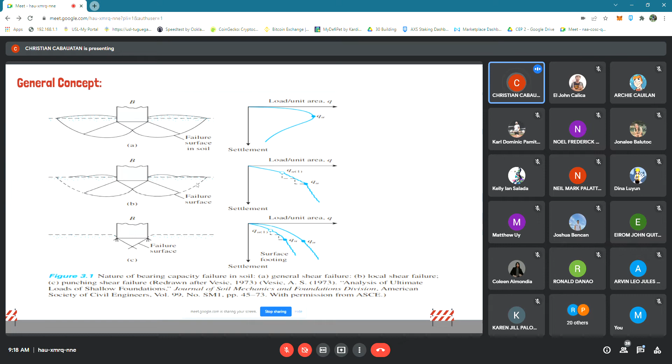There are two types involving soil bearing capacity: one is the Terzaghi bearing capacity, and the second is the Meyerhof bearing capacity. For now, we are dealing with Terzaghi's bearing capacity.

So what is the Terzaghi bearing capacity about? Terzaghi, 1943, was the first to present a comprehensive theory for the evaluation of the ultimate bearing capacity of rough, shallow foundations. According to his theory, a foundation is shallow if its depth is less than or equal to its width - similar to what we discussed earlier about shallow foundations.

He suggested that the foundation depth can equal 3 to 4 times its width, and this may still be defined as a shallow foundation. He also suggested this for a continuous or strip foundation whose width to length ratio approaches zero.

The failure surface in soil at ultimate load may be assumed to be similar to that shown in figure 3.5 later. Note that this is the case of general shear failure as defined in 3.1a. The effect of soil above the bottom of the foundation may also be assumed to be replaced by an equivalent surcharge, where gamma is the unit weight of soil.

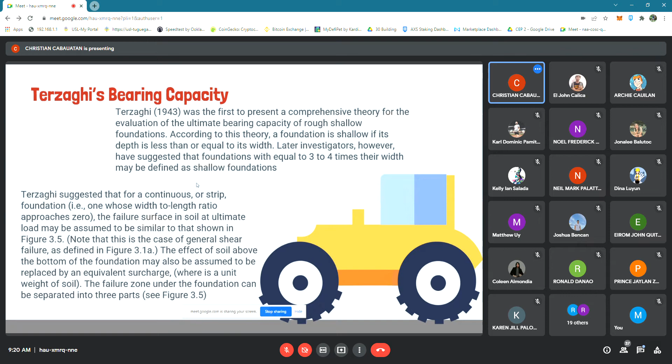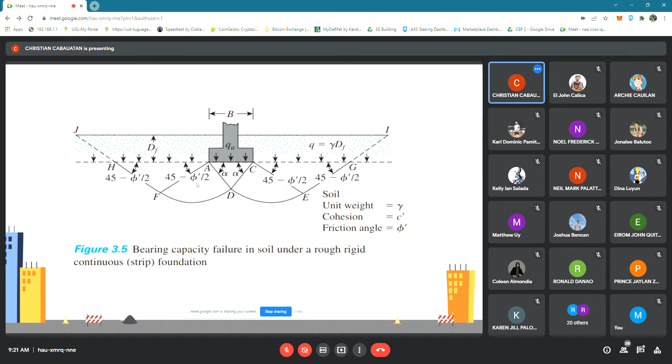So using equilibrium analysis, Terzaghi expressed the ultimate bearing capacity in this general form. So the ultimate bearing capacity can be derived as C and Nc.

Don't mind the apostrophe on top of the C, don't pay attention to that. So: C times Nc, plus Q times Nq, plus 1/2 or 0.5 gamma B times N-gamma. This will be used if the foundation is a strip or continuous foundation.

Wherein C, as I said before, is the cohesion of the soil. Gamma is the unit weight of the soil. And Nc, Nq, and N-gamma are the bearing capacity factors. These could be determined once the friction angle is identified. It's in the table, I'll show you later.

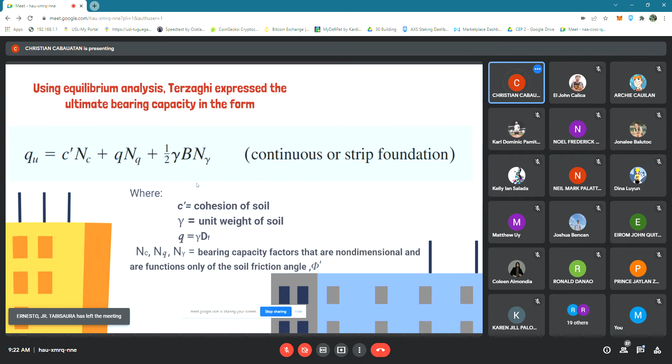So to estimate the ultimate bearing capacity of square and circular footing foundations, the equation may be respectively modified - since it's not just for strip footing or continuous footing.

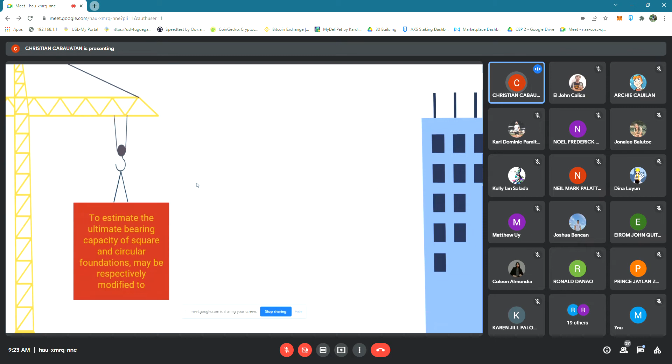Terzaghi also introduced the square footing and the circular footing. For square footing, the ultimate bearing capacity is equal to 1.3 CNC plus QNQ plus 0.4 gamma BN gamma. The difference lies in their coefficients.

For strip footing, the coefficients are 1, 1, and 0.5. For the square footing, the coefficients are 1.3, 1, and 0.4.

For circular footing, the ultimate bearing capacity is equal to 1.3 CNC plus QNQ plus 0.3 gamma BN gamma. So for circular footing, the difference is only in the coefficient of gamma BN gamma, which is 0.4 for square footing and 0.3 for circular footing.

This was derived from the formulas. We would not derive it further because the derivation is very long. It could take us 2 sessions or 3 hours just to derive one equation.

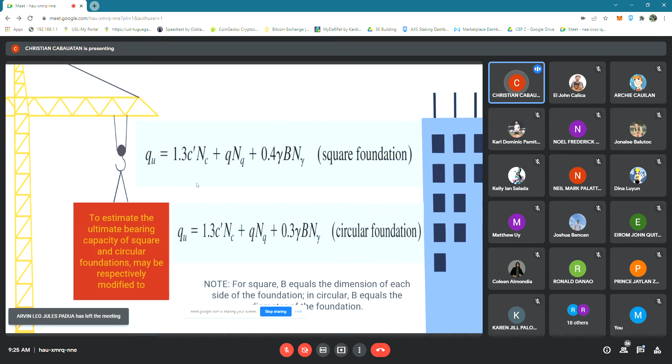Take note that for square footing, B equals the dimension of each side of the foundation. For circular footing, the width B equals the diameter of the foundation. Remember that.

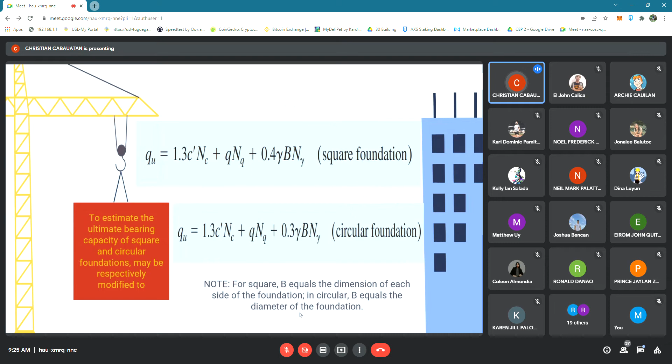For foundations that exhibit the local shear failure mode in soil, Terzaghi suggested these modifications. The formula or equations change when using local shear failure compared to the general shear failure. So for local shear failure, these would be the equations.

For strip foundation, the ultimate bearing capacity is equal to 2/3 CNC plus QNQ plus 0.5 gamma BN gamma. For square foundation, it would be 0.867 CNC plus QNQ plus 0.4 gamma BN gamma. And for circular foundation, it would be 0.867 CNC plus QNQ plus 0.3 gamma BN gamma.

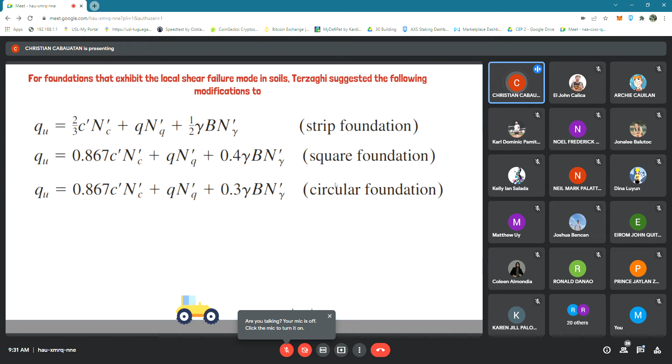So just as general shear failure has a table to determine the different coefficients of bearing capacity, there's also one for local shear failure. This one will be different.

So for that one, if the friction factor is 0, the corresponding coefficients of NC, NQ, and N gamma are 5.7, 1, and 0 respectively.

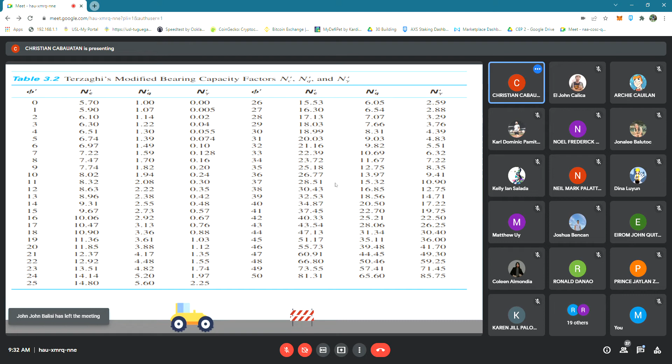Do you have any questions, Jaan? None. Okay. The next one is the factor of safety.

As I discussed earlier, Q allowable is equal to Q ultimate, or the ultimate bearing capacity, over the factor of safety. The factor of safety typically ranges from 2.5 to 3.

However, some engineers prefer to use a factor of safety. The net ultimate bearing capacity is defined as the ultimate pressure per unit area of the foundation that can be supported by the soil in excess of the pressure caused by the surrounding soil at the foundation level.

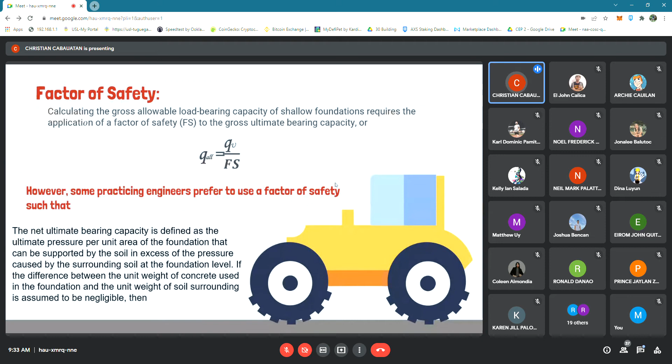If the difference between the unit weight of concrete used in the foundation and the unit weight of the surrounding soil is assumed negligible, then the net ultimate bearing capacity is equal to the ultimate bearing capacity minus the bearing capacity, which is derived by gamma, or the unit weight, times the depth of the footing.

So the derived formula is: Q allowable, or the net ultimate bearing capacity allowable, is equal to Q ultimate minus the bearing capacity, over the factor of safety. That's how they used the factor of safety.

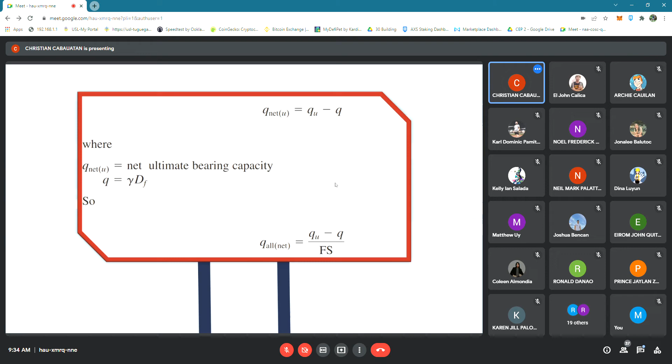Do you have any questions regarding that before we move on to our first problem? Any questions? Okay, I hope so.

For the first question, okay? Engineer Pamitan, can you read the problem?

A square foundation is 2 meters by 2 meters in plan. The soil supporting the foundation has a friction angle of 25 degrees and cohesion of 20 kilonewtons per square meter. The unit weight of soil, gamma, is 16.5 kilonewtons per cubic meter. Determine the allowable gross load on the foundation with a factor of safety of 3. Assume that the depth of the foundation is 1.5 meters, and that general shear failure occurs in the soil.

Okay, thank you, Engineer Pamitan. So what are we looking for here? It is the allowable gross load. Is that correct? Am I correct?

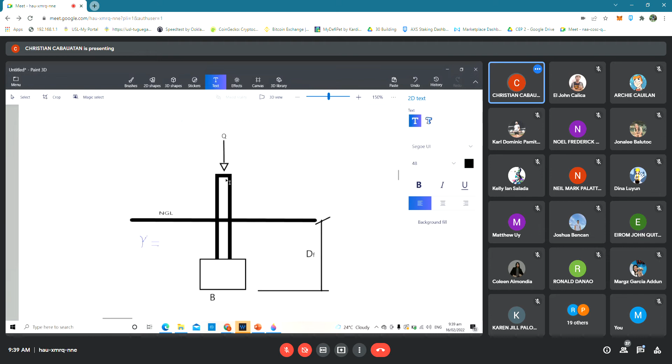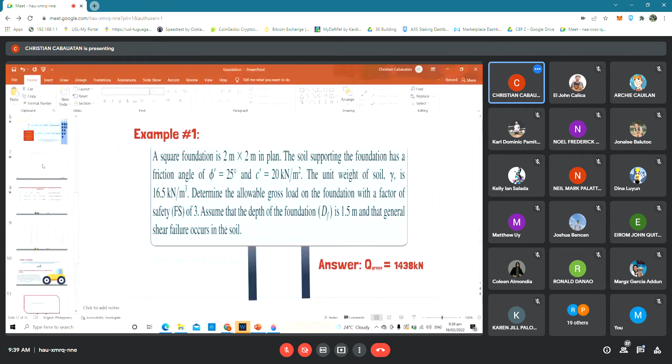So what is the friction factor? It is 25 degrees. Let's go to the table. What is the corresponding value for 25 degrees? It's down here. See it? For 25 degrees, NC is 25.13, NQ is 12.72, and N gamma is 8.34.

Did you follow? Did you follow? Okay, thank you.

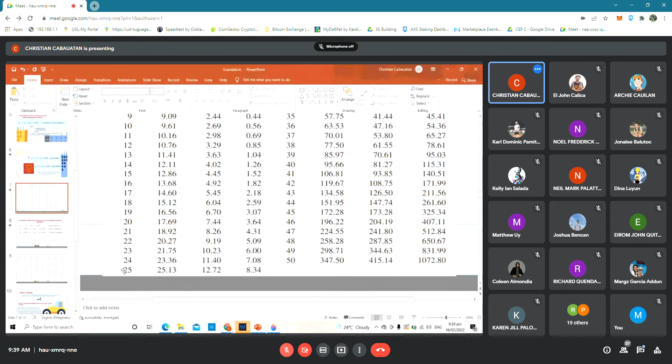So let's go back there. I've already put that in - NC, NQ and N gamma are there. And I also put the width of the footing, which is 2 meters. The cohesion is 20 kilonewton per meter square. And gamma, I just wrote as Y, is 16.5 kilonewton per meter cube, and the friction angle is 25 degrees.

Okay, so what formula do we use? It's a general shear failure. What is the formula for a square footing or square foundation? What is the formula? Anyone from the group - QU is equal to?

Okay. QU is equal to? Ano yung formula natin na gagamitin natin? 1.3, 0.867. Ha? Ano yun?

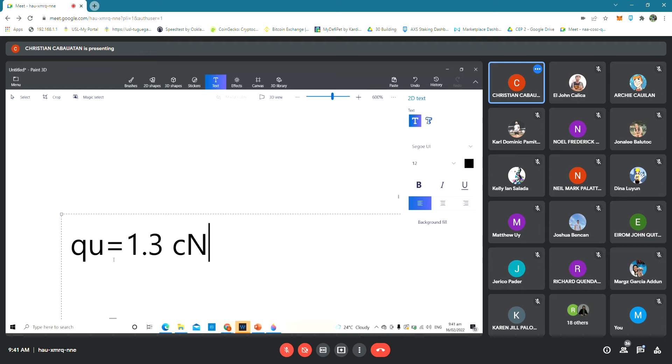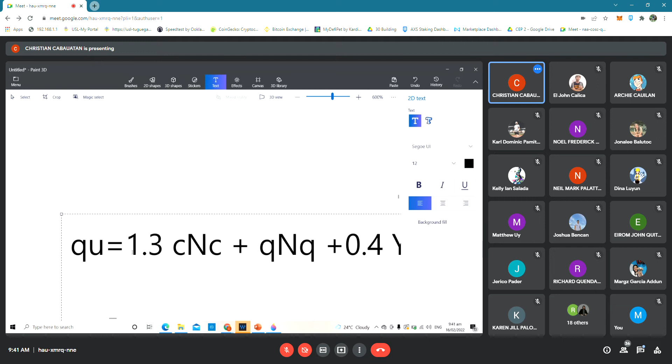1.3 CNC, CNC plus QNQ, sir. QNQ plus 0.3 ba? 0.4, 0.4. Okay, buti at naalala nyo. 0.4 gamma, BNY gamma, sir. gamma. B and gamma. Tama ba? Tama lang? Agree lahat? Yes, sir.

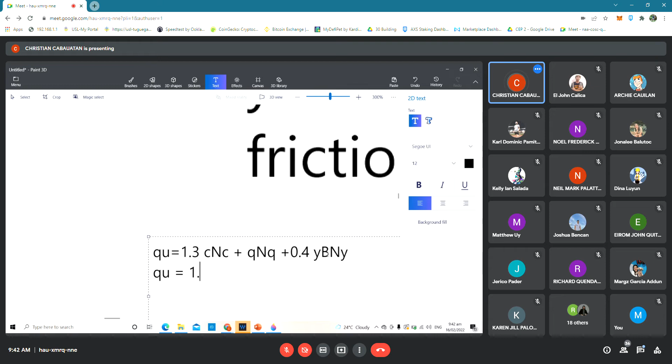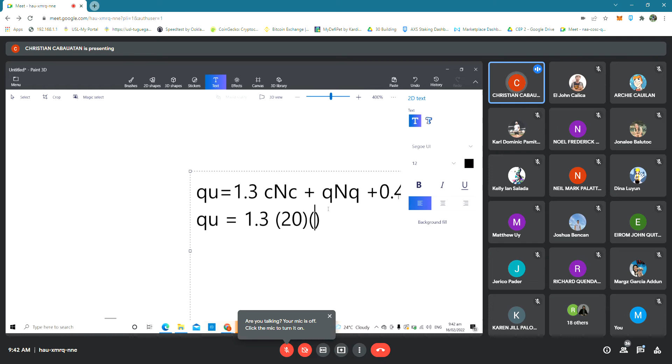Okay. So QU therefore is equal to 1.3 multiply natin kay C. Ano yung gano'n na ni C? It is 20 kilonewton. Tama? And then ang kanyang NC. Ano yung kanyang NC na? It is 25.13, 0.13.

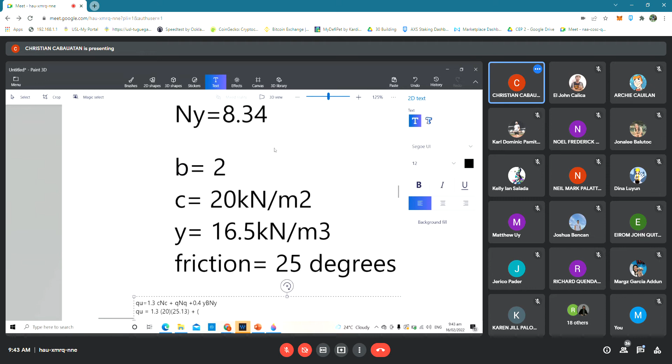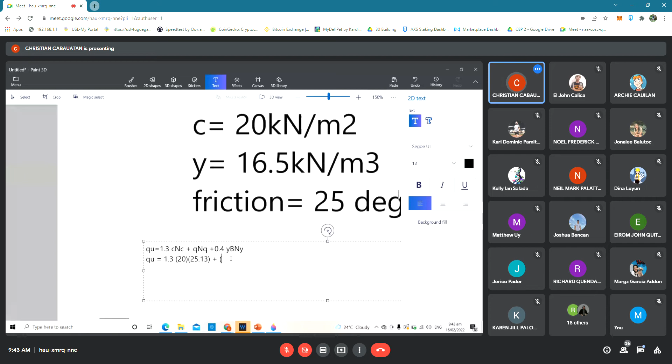I-add natin kay Q and Q. Ano na yung Q? Ano yung ilalagay natin sa Q? Anyone from the group? Ano yung ilalagay natin sa Q? Gamma times DF, sir. Okay. Ano yung gamma natin? It is 16.5. Am I right? Tama ba? Yes, sir. O, 16.5.

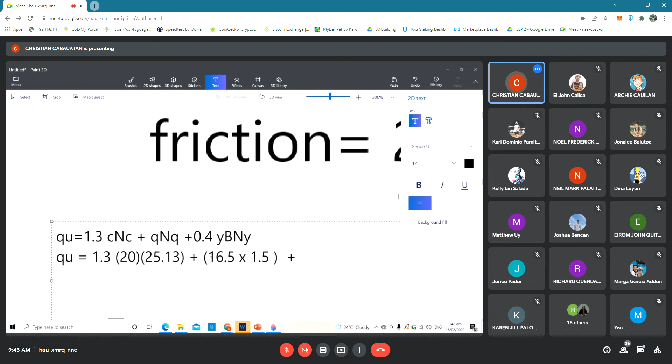Multiply natin siya kay the depth of the footing, which is 1.5. Ilang? Multiply pa natin yung dalawa kay NQ. Ano yung NQ natin? 12.72. Yesterday, nakakalimutan ko si NQ na ilalagay.

And then, multiply, i-add natin kay 0.4 times gamma. It is 16.5. Multiply natin kay B. It is 2. And then, multiply natin siya kay, ano yung multiply natin kay N gamma, which is 8.34.

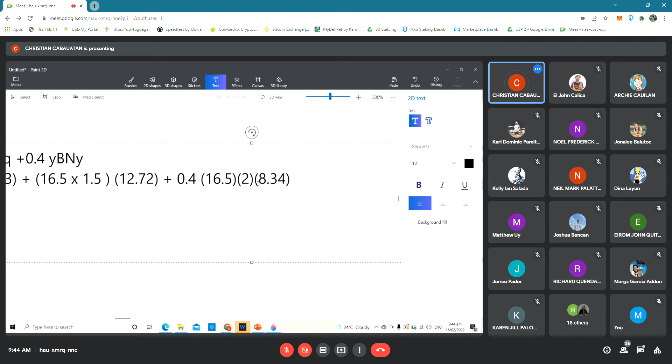Ano yung kanyang ganon? Ano yung kanyang tawag dito? Unit. Ano yung kanyang unit? Agree ba ang ilalagay kong unit ay kilonewton per meter? Agree ba lahat? kilonewton per meter?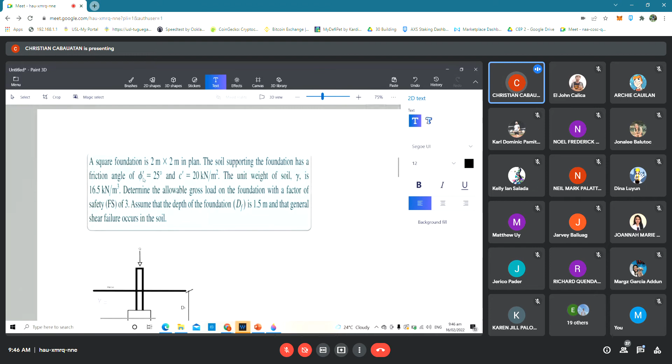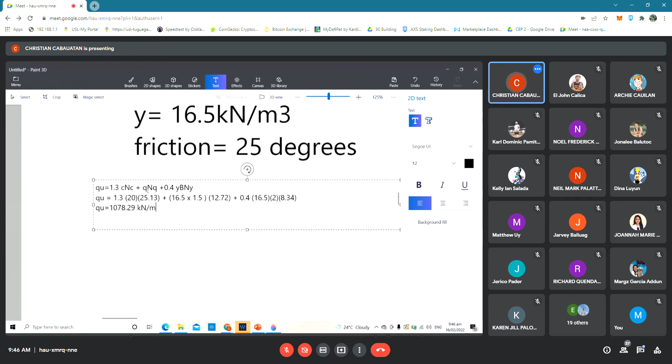Tignan nyo yung problem. Yan o. Yes, sir. Meter ba? Yan o. Tignan yung problem. Observe nyo yung problem. Meter ba siya? O, tignan nyo na lang dito sa formula na to. Ang cohesion, it is kilonewton per meter squared times NC. No? Ano? NC, wala siyang ganun yan. Wala siyang tawag dito. Wala itong unit.

So, ang unit ni ultimate bearing capacity ay kilonewton per square meter. Okay? Tama lang? Okay lang? Okay lang ba? Yes, sir. Okay lang ba? Clear? Okay.

So, ito na ba yung hinahanap natin? Yung 1,078.29 kilonewton per meter square? Yan na ba yun? Engineer Cabauatan. Yan na ba yung hinahanap natin? Si 1,078.29? Engineer Cabauatan.

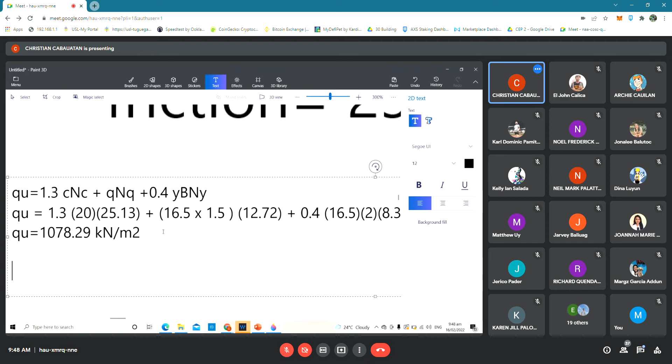Hindi pa po, sir. Bakit hindi yan? Ano ba yung... Kasi... Yes. Ano yun? Allowable gross po ang hinahanap. Hindi ba ito yung allowable gross? Hindi pa ba ito yung si allowable gross? Guys, hindi pa ba ito yung si allowable gross?

Okay. So, tama yung sinabi ni Engineer Cabauatan, no? Hindi pa ang hanapin natin is si allowable gross. Hindi pa ito si allowable gross kasi hindi pa tayo nag-subtract or hindi pa tayo nag-apply ng kanyang factor of safety. Okay? So, it is a ultimate pa lang. Ultimate bearing capacity niya pa lang.

Therefore, to determine its allowable, no? So, Q allowable, the Q allowable is equal to the Q of ultimate divided by factor of safety. Tama ba? Tama ba yung formula? Tama lang ba?

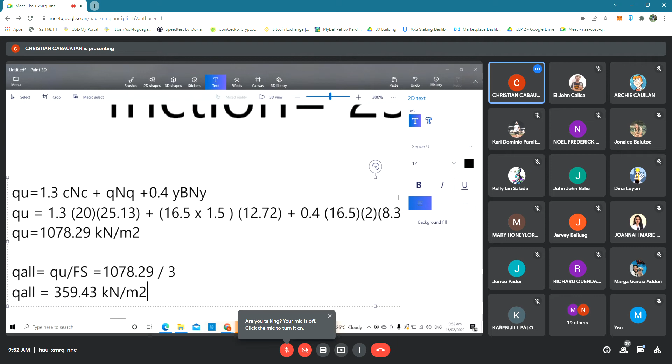Okay. Going back to our sa ating problem. Okay. So, ito na ba yung hinahanap natin? Si Q allowable, 359.43 kilonewton meter squared. Di ba? Hindi pa yan. Kasi ang nasa problem, it is stated na ang ating hanapin ay si allowable gross load. Load siya.

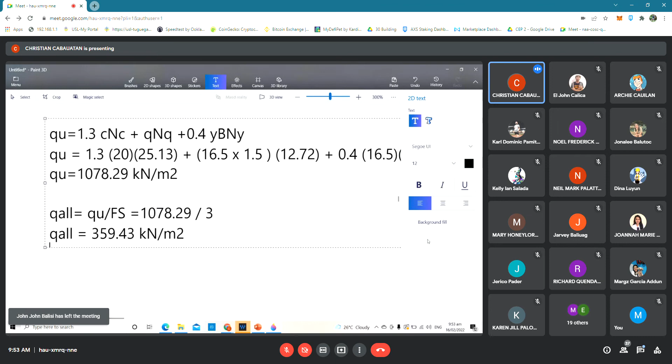No? So, kapag yan ang tinataatin, ang ating formula, we consider its area. Kanyang area. Ang footing area. No? So, therefore, ang total load or total allowable gross load can determine as Q malaki is equal to the Q allowable times, ano yung multiply natin sa kanya? Ano yung multiply natin sa kanya?

Hindi ba ang kanyang area? Tama ba na ang kanyang area ang i-multiply natin? Okay. Ang area ng square is equal to B squared.

Therefore, ang Q natin is equal to 359.43 times the area, which is 2 times 2, 4. Okay? So the answer would be...

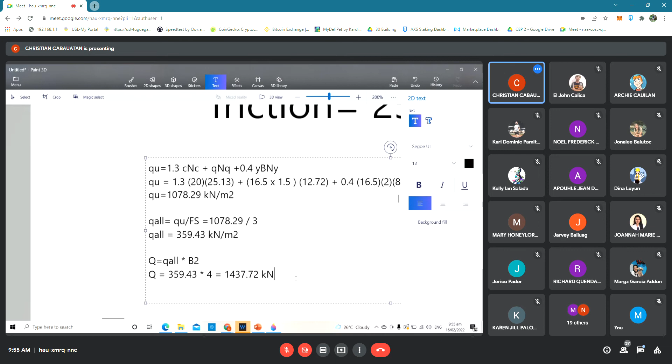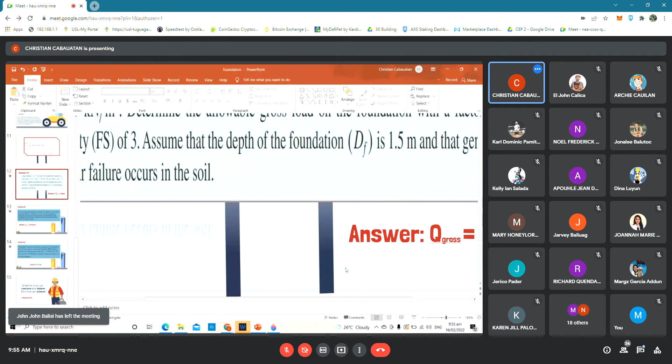Kilonewton. Okay. Kasi nag-cancel na si area niya. Okay. Ito na yung kanyang sagot. Yan. Yan ang kanyang sagot. Ganun lang namin. Inatawag dito. Ni-round up ko lang. 1,438 kilonewton.

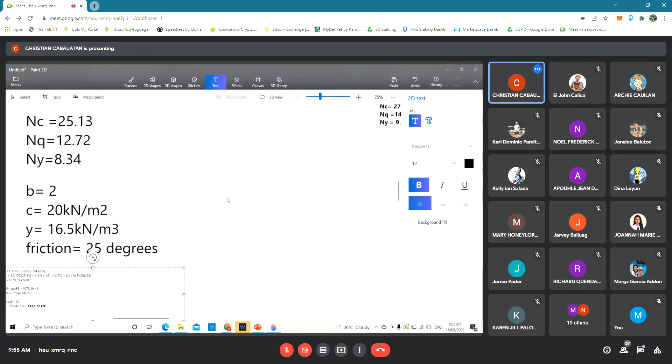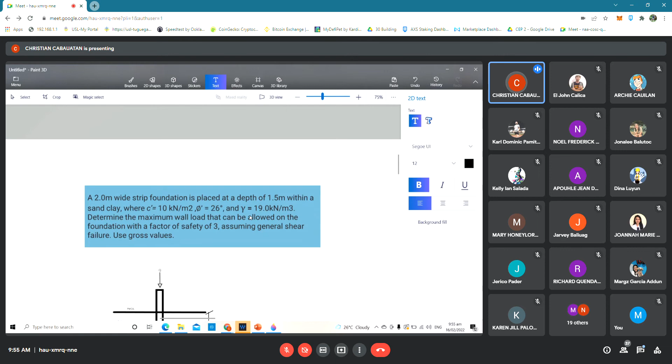Okay. For the next problem. Kita nyo ba? Kita ba? Okay. Engineer Matthew Uy, can you read the problem?

A 2-meter wide strip foundation is placed at a depth of 1.5 meter within a sandy clay, where C is equal to 10 kilonewton per square meter, friction angle is equal to 26 degrees, and the gamma is 19.0 kilonewton per cubic meter. Determine the maximum wall load that can be allowed on the foundation with a factor of safety of 3, assuming the general shear failure. Use gross values.

Okay. Thank you, Engineer Uy. So, ano yung sinabi niya ulit sa problem natin? Ano yung gagamitin nating formula? It would be a general shear failure. Tama ba? It was stated in the problem.

And then, ano yung formula ni strip foundation? Maalala nyo ba? Ito, kinuha ko na yung kanyang respective bearing coefficients para hindi na tayo pupunta doon sa kanyang table. So, what is the formula of a strip foundation? Maalala nyo?

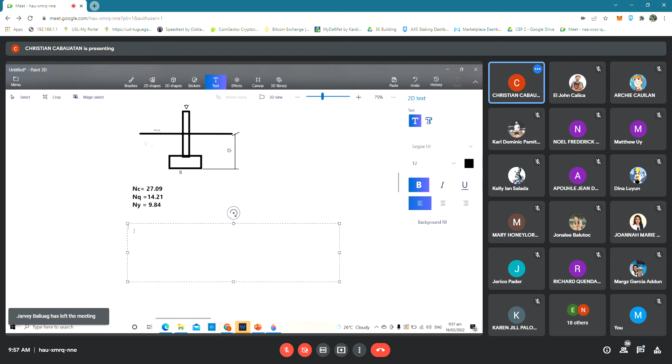CNC. Okay? QU or the ultimate bearing capacity is equal to CNC po. CNC plus QNQ, sir. QNQ plus 1/2 gamma B N gamma. 1 half or 0.5 gamma B and gamma. Okay lang?

Okay lang. So QU is equal to, ang cohesion na binigay is 10. At ang kanyang NC ay 27.09. I-add natin kay Q and Q, which is the gamma multiply the depth of the footing. Okay? Si the unit weight is 19. Tama ba? Ano yung nasa problem natin? Or 19.5? Tama. 19.

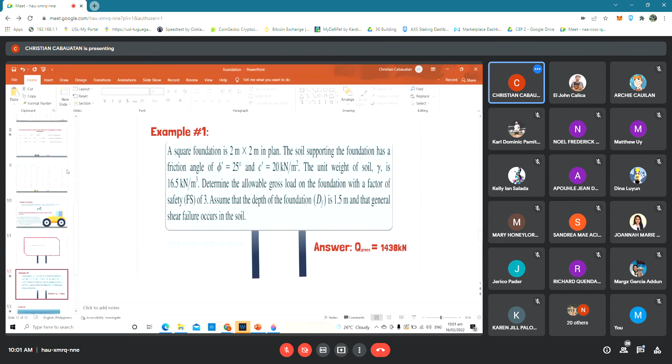Sir, yes, wala po bang two-third yung sa CNC, sir? Si CNC kasi, it is a general shear failure, di ba? Tama? Going back, tignan natin. Ayan, di ba? Si continuous or si strip foundation. Baka ang tinutukoy mo ay yung si local shear. Baka ito yung tinutukoy mo. Okay, sir. Thank you, sir.

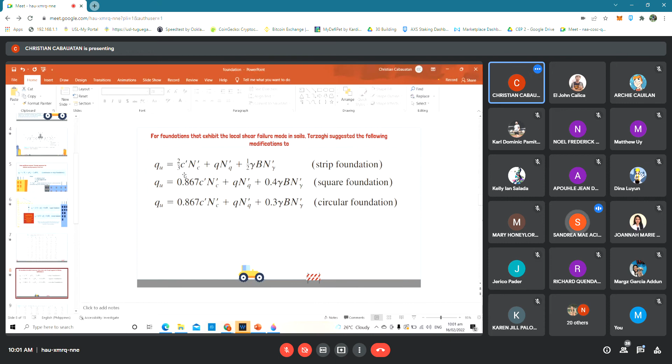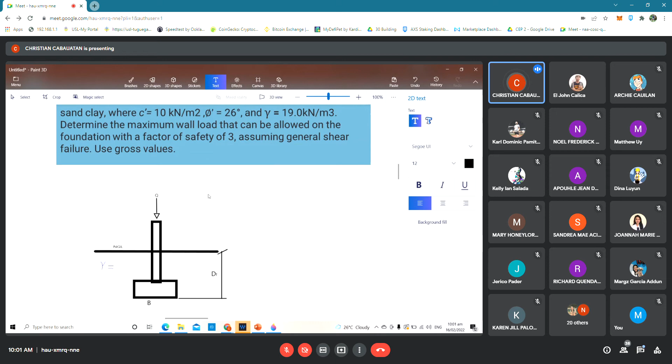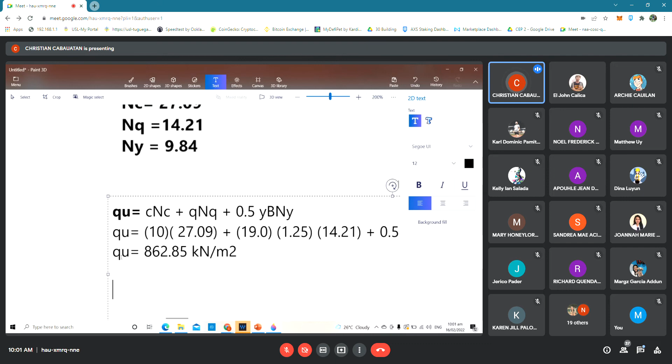Okay. So, ang nandoon sa problem, it was stated as the general shear failure. Okay lang? Be careful of that. Ha? Ingat-ingat kayo. Lalo na sa board exam nyo, baka mamaya, instead of local shear failure ang gagamitin nyo, baka ginamit nyo na ang general shear failure o vice versa. Okay? Any questions? May question ba?

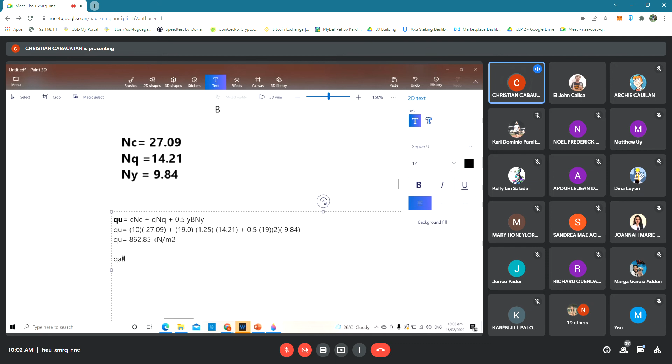Okay. So, kailangan natin kunin din si allowable. Yung allowable niya, which is QU divided by its factor of safety. Okay? So, the ultimate bearing capacity would be 862.85, 0.85, divided by the factor of safety which is 3. Okay lang? Okay lang ba?

Ano yung sa QU natin? 700. 7. Ha? Hindi ba? Ito? Sige, tignan natin. Sir, Yes, yes. Sir, yung sa depth mo po ata, 1.25, 1.5 dapat. Sorry. Oo pala. 1.5. Okay. Namali tayo ng in-input. Okay lang?

So, na-derive na yung 862. Yes, sir. Okay. So, sorry doon. Napindot ko lang yung 2 kanina. Hindi ko na napansin. Okay.

So, going back to the allowable bearing capacity, okay lang to? So, tama na din to. 862 divided by 3. Tama lang? Okay. So, ano yung sagot dyan? It would be 287.6.

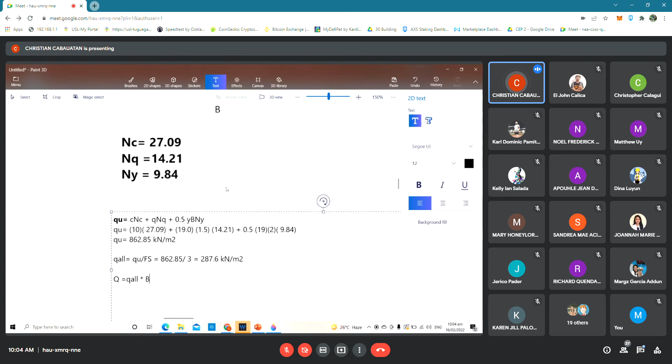Since it is a strip footing, it's a 2 meter wide strip foundation. Hindi siya kagaya ng square footing na the same ang kanyang width, B, na it would be B times B lang, or 2 by 2 kapag square. Pero kapag strip foundation naman siya, kapag walang ini-stated na length, you would default as 1. So ang ibig sabihin nito, a 2 meter wide per meter length.

Okay lang ba? May question doon? Hello? May question ba doon?

Okay, kapag hindi stated, kapag strip foundation siya, for example it is a 5 meters wide strip foundation, ang gagawin nyo dyan, it would default as per meter length. So the area, therefore, is 2 times 1. So Q allowable is 287.6 times 2 by 1.

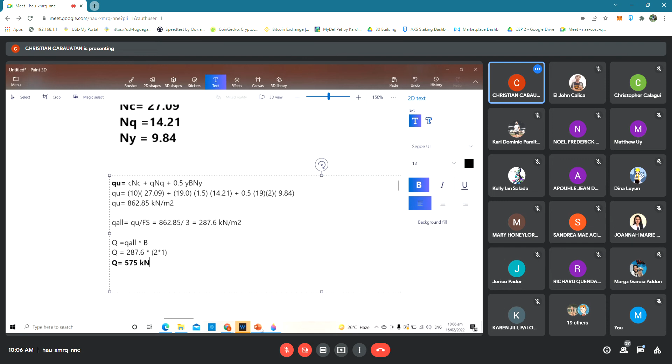Kuha nyo ba yung 575? Yes sir, kuha. Okay, so ang kanyang sagot ay 575, the Q maximum allowable.

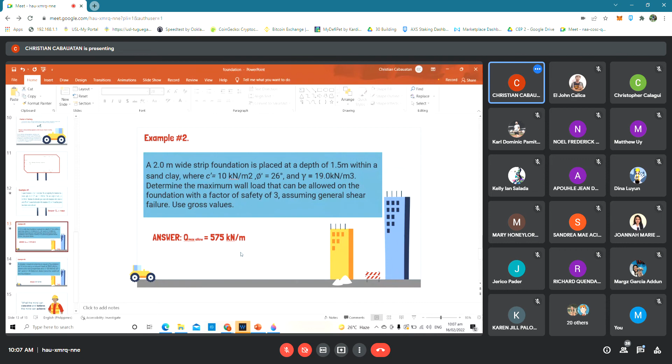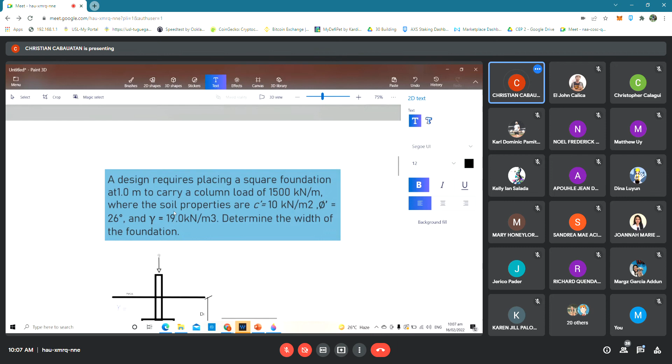Okay, so we will go na sa third problem. Meron ba? May katanungan doon?

Engineer Kendangan, please read the last problem. A design requires placing a square foundation at 1 meter to carry a column load of 1,500 kilonewtons per meter, where the soil properties are C prime equal to 10 kilonewton per meter square, phi prime equal to 26 degrees, and gamma equal to 19 kilonewton per meter cube. Determine the width of the foundation. Okay, so ang hanapin natin daw dyan, it is the width of the foundation.

Question, what equation or what failure would we use? Ano yung failure na gagamitin natin for this specific problem? Anyone? Hello, Engineer Palataw, ano yung ating gagamitin na failure for this specific problem? Sige lang, try mo, i-guess mo lang. Wala po akong idea sir. Hindi ko po alam, sir.

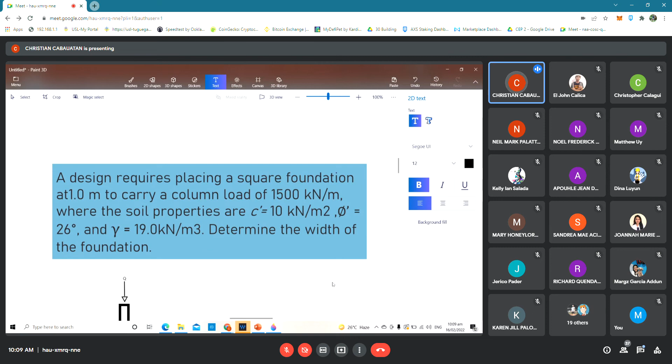Okay lang kung ganun. So, I've said before na kapag hindi siya stated na general shear failure or local shear failure, basta kapag ang binigay na properties ng soil ay merong, what do you call that, may kalakip siyang apostrophe, it would be a local shear failure. Tama ba? Okay lang ba? Yes sir, okay.

So hinanap ko na din yung, sige tignan natin, try natin. Si internal friction or the friction angle is 26 degrees. Try nating hanapin sa table. 26 degrees, so ito na si 26 degrees, sa taas yun. Ay mali. Ayun, kita nyo? Sa taas. Itong nasa ganun ko, cursor ko, 26 sa taas, sa right side, upper right side. Kita nyo siya? Ang kanyang NC ay 15.53.

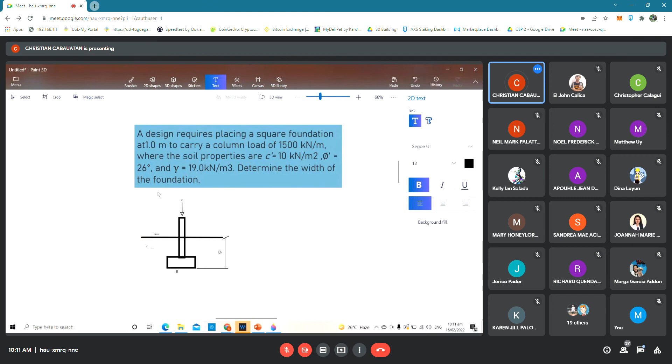Yes sir, okay. At ang kanyang NQ is 6.05. At ang kanyang, wait. Okay, so internal friction is 26. Wait lang guys, wait lang.

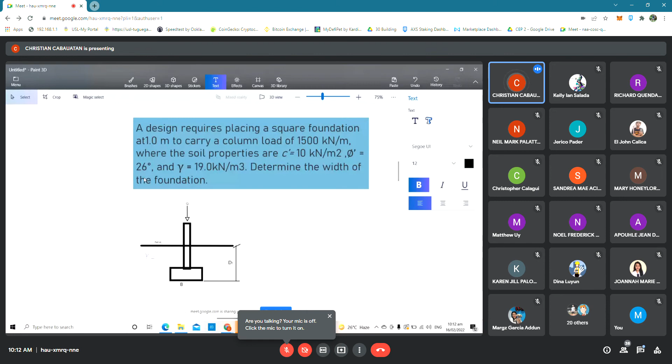Okay, going back. Sorry, yung magiging sagot dito pala sa problem na 'to, dun sa PowerPoint ko I have considered na 24 degrees. Mali yung naisulat ko na 26 degrees. Pero we will use 26 degrees na lapak. Baguhin ko na lang yung aking answer mamaya, okay?

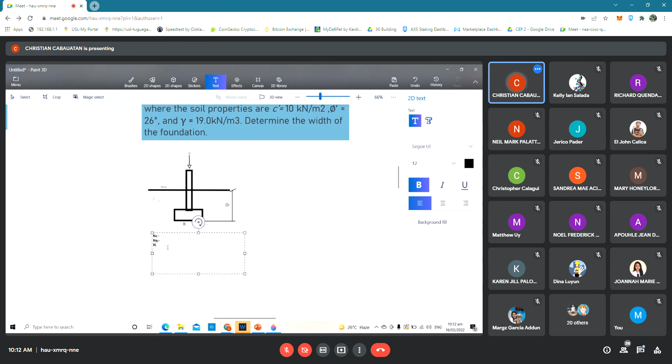So ang kanyang NC, lagay na lang natin. Ang kanyang NC equal to, ang kanyang NQ equal to, and ang kanyang N gamma ay equal to, kunin lang natin, table na yan. So 15.53, 15.53, 6.05, and 2.59. Okay, wait.

Pero sometimes, students na kapag hindi siya stated and then wala siyang subscript, it is mostly, tawag dito, mostly a general shear failure ang ginagamit. Pero during the board examination, kung hindi nyo siya makuha, kung hindi nyo makuha ng local shear failure, try nyo siya sa general shear failure. Yun lang naman din pagkakaiba niya. Pero most of the time, don't worry, based on my experience, these bearing capacities are always given. Ay sorry, 15.53, and then 6.05. Okay.

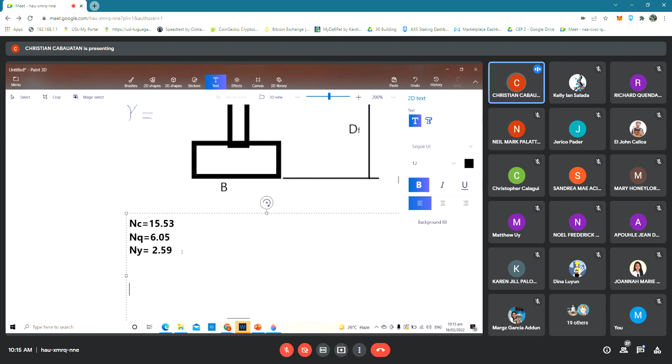Okay, so ano yung magiging equation natin dito? We consider it as a local shear failure, and it is a square foundation. So ano yung formula niya? 0.867 sir, may square foundation ba siya? Yung nakalagay dito, o yan, square foundation siya. So we will go back to the square foundation equation, which is 0.867 C NC plus Q NQ plus 0.4 gamma B N gamma.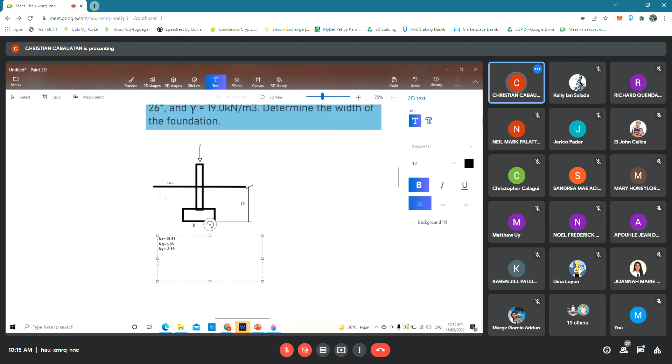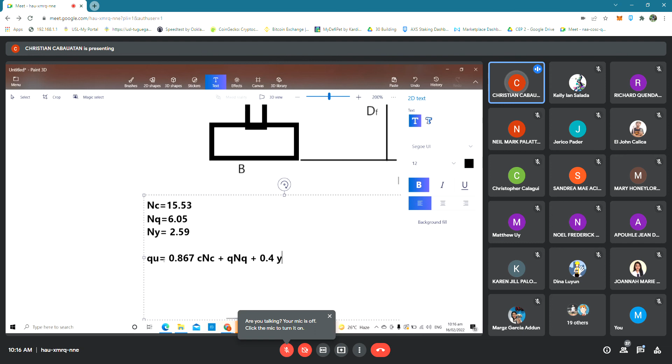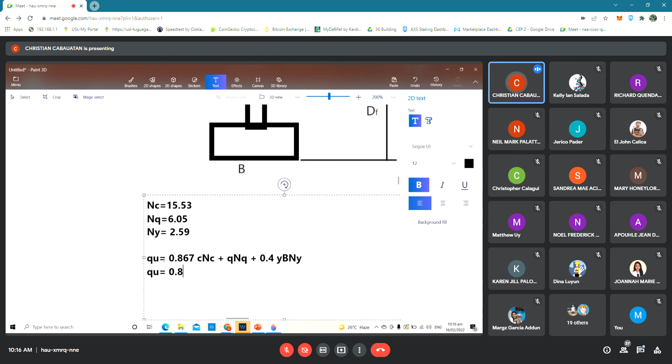Okay, so QU is equal to, ano ulit yun? 0.867 C NC plus Q NQ plus 0.4 gamma B N gamma. Okay, so ang QU natin, therefore, is equal to 0.867, ang kanyang cohesion, it is 10.

At ang kanyang NC ay 15.53. Okay lang ba? Q and Q. Ano yung kanyang Q?

18.5 multiply by 1, the depth of the footing. 18.5, it is the unit weight of the footing multiply by 1, the depth of the footing, multiply by its NQ, which is 6.05. Add natin kay 0.4 multiply by the gamma, which is 18.5.

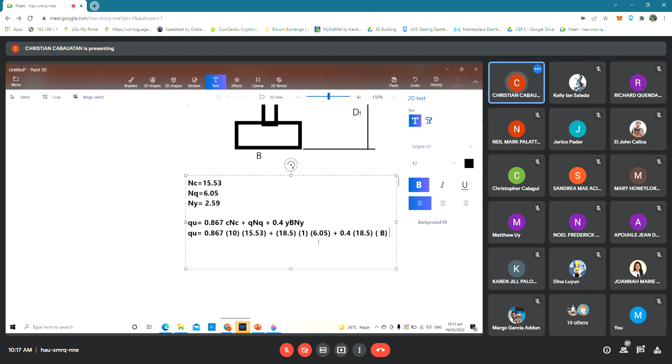Multiply natin siya kay the B, which is yun yung unknown, yun yung ating hinahanap. Multiply natin siya kay N gamma, which is 2.59.

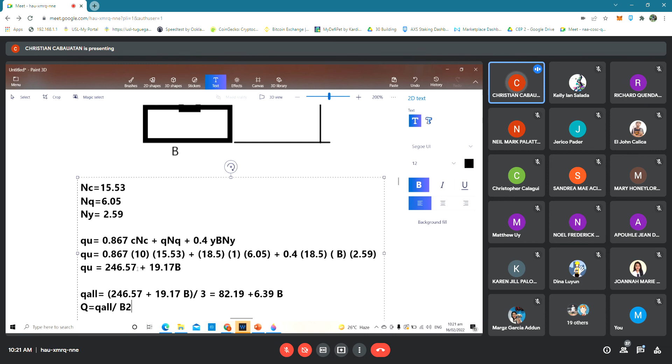Or the applied pressure to the ground. Okay? Therefore, ang Q natin or the Q gross, it is equal to the Q allowable divided by its area, which is B squared because it is square. Okay? Kuha ba?

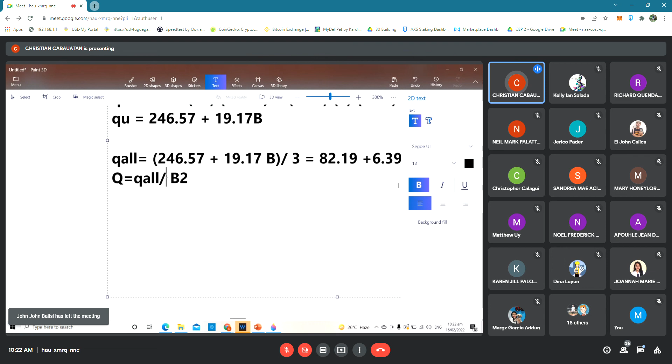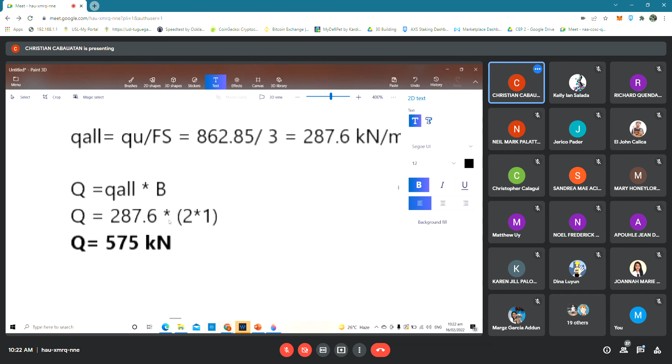Kuha ba? Okay, so ano yung Q natin? Q allowable. Divide ba yan o multiply? Tignan natin sa kabila, it is multiply. Huwag niyo kalimutan yan, oh. Multiply siya. Tama ba? Multiply siya yan, di ba? Okay lang. Okay, so it is multiply.

Therefore, ang Q niya doon na load na binigay sa problem, it is 1,500, it is the column load, no, kilonewton per meter. So, 1,500 kilonewton per meter squared divided by its B, which is yun yung hinahanap natin, B squared. Okay? Equal natin siya kay Q allowable, which is... wrong, Q allowable pala is 82.19 plus 6.39 B. So, ano yung ating B?

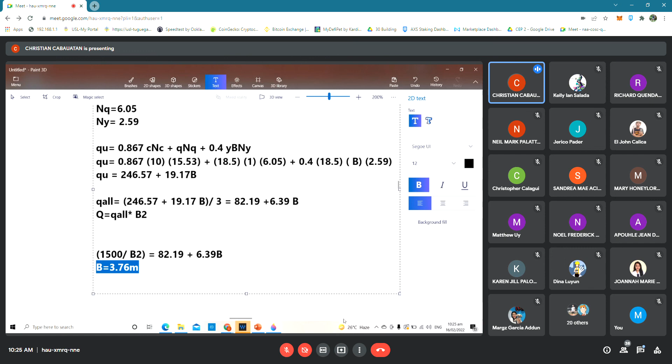Okay, so yun lang. So kapag hinahanap yung, tawag dito, kapag hinahanap yung kanyang dimensions, it would be the design. Kailangan mong i-design. Pero kapag hinahanap naman yung load, it would be the, tawag dito, actual ata yun, yung word na yun. So it is the design and hindi ko na maalala kung anong word.

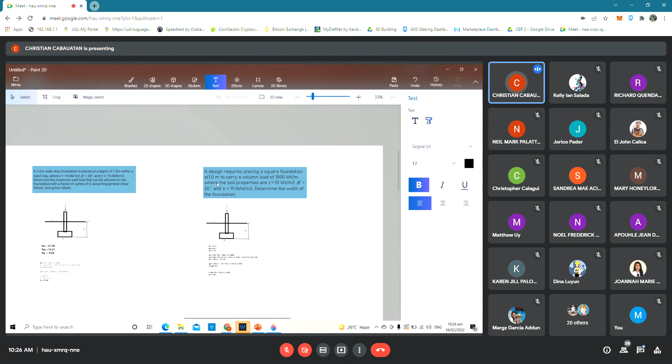So, may questions ba regarding the solutions or regarding the topic for today? May question ba?

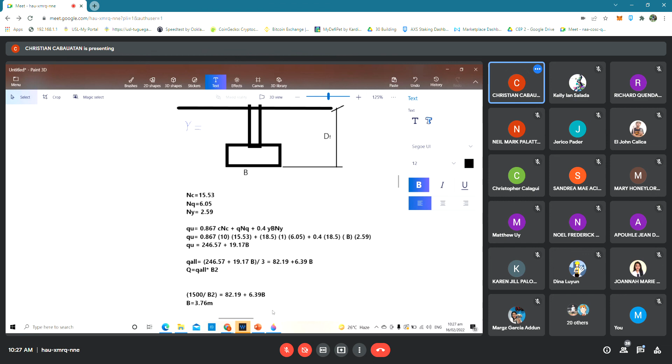So, before I will end, gusto kong iwan sa inyo itong quote, no? So, what the mind can conceive and believe, the mind can also achieve. Okay? Nasa inyo na yan kung ano yung inyong pinaninindigan at inyong pinaniniwalaan hanggang sa inyong future journey sa board exam especially, and ma-achieve nyo yung gusto nyo mga ganun. Achieve high. Okay?